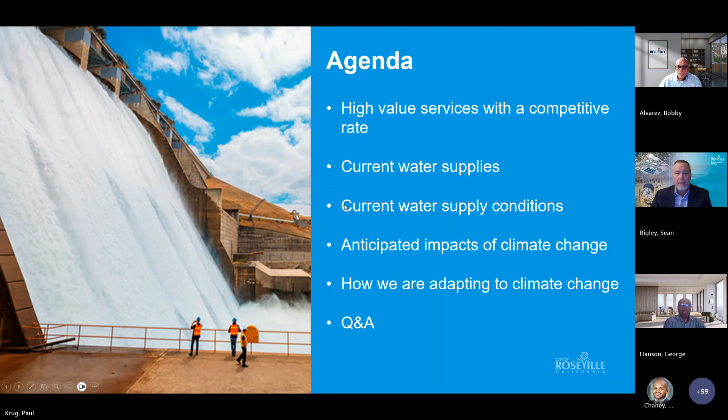All right, so in terms of our process relative to our rates, it's really important just to emphasize what the overarching structure is relative to setting utility rates. And really what we do is we look at our utility rates every 2 years. And what we incorporate in that is a 10-year projected outlook in terms of expenses and revenues. In that process, environmental utilities has focused in on proactively funding rehabilitation costs via rates for utility infrastructure.

As you can imagine, in the city of Roseville, we have a lot of infrastructure that has to be maintained in order to ensure that we have a reliable water supply going forward. And the way we do that is through a pay-as-we-go system, essentially funding over time a rehabilitation account. And what that allows us to do is to pay for those costs as they happen and also avoid costly borrowing. So really creating good value for our customers at a lower rate, if you will.

We have remained among the lowest utility rates in the region, and we provide competitive rates, but we also, most importantly, provide a high level of service. So we really see it as a good value for our customers for the level of service and the rate that's being paid. And then in terms of the city's financial management, the utilities have had a long history of being strongly managed from a financial perspective and have maintained a favorable financial position over many years.

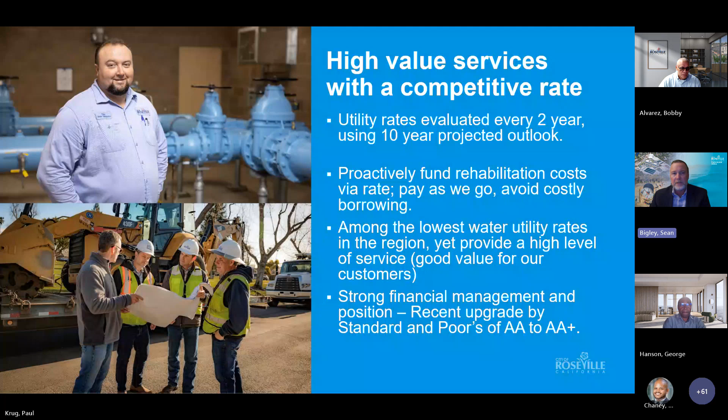Most notably, a fairly recent upgrade by Standard & Poor's raised our rating from AA to AA plus. So that indicates strength with respect to our financial position here in Roseville. Important just to state that.

All right, so moving on, I want to cover the current water supplies that are part of our mostly surface water portfolio, and talk a little bit in more detail about our groundwater system. So in terms of the supplies that Roseville has available, they are diverse supplies, incorporating both surface water supplies as well as groundwater sources. The first supply is a supply through the Central Valley Project. The Central Valley Project is essentially a federally run water project that supplies many water contractors throughout the state of California.

Roseville is a Central Valley Project water contractor. We have a repayment contract. It's an indefinite term water contract with the Bureau of Reclamation for 32,000 acre feet of water. An acre foot essentially is a football field minus the end zones with a foot of water. So to give you kind of context, that's how much water we're talking about. In terms of how many homes that serves, an acre foot will serve roughly 2 to 3 homes per year in terms of water supply.

The next surface water supply is through Placer County Water Agency, and that's actually through the Middle Fork Project, which is a county-wide project that was voted by the Placer County voters back in the 1960s. And with that, we've got a 34,000 acre foot contract with Placer County Water Agency. Additionally, recently we were able to successfully negotiate an amendment with Placer County Water Agency to add 10,000 additional acre feet of water as a future option to that contract.

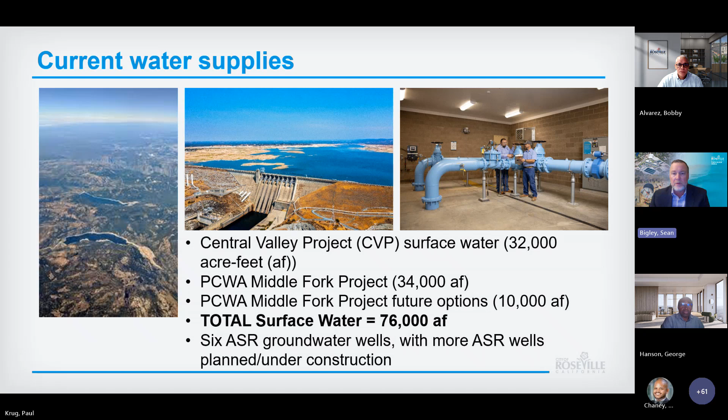All right, so with respect to the Central Valley Project water supply via Folsom Reservoir. So again, Folsom Reservoir is managed by the U.S. Bureau of Reclamation. Roseville does not manage that reservoir. We are just simply a contractor. And so that project was actually authorized by Congress in 1944. The Central Valley Project is a system of integrated reservoirs, canals, and other infrastructure that serves multiple contract cities and other contract users throughout California.

Folsom Reservoir is the reservoir that Roseville draws its surface water supply from. The construction of that reservoir began in October of 1948, and then ultimately the reservoir was completed in 1956. And then since 1971, Roseville has had access to Central Valley Project surface water.

And with that CVP supply, it's a contract. And so there are certain circumstances where there are provisions in that contract that require water cutbacks. And this is specifically during dry or drought conditions. And that is a condition of the contract. And Reclamation typically manages how those cutbacks would occur with each of the contracting agencies.

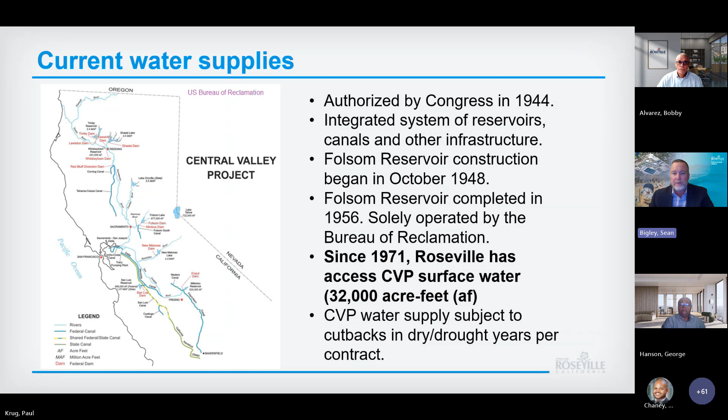All right, let's talk a little bit about the other sources of surface water through the Middle Fork Project, which is water access through a contract with Placer County Water Agency. So the Middle Fork Project was outlined in 1960. In June 1961, Placer County voters approved a $140 million revenue bond for the Middle Fork Project. And when we say voters, it's countywide voters, including voters within the city of Roseville at that time. Construction of the project was completed in 1967.

The Middle Fork Project consists of a system of reservoirs, canals, and other infrastructure with 342,000 acre feet of total storage. Again, the surface water from the Middle Fork Project that Roseville receives is now at over 40,000 acre feet with the options included. The Middle Fork Project has traditionally been used as a backup surface water supply. However, that water supply over time is going to end up serving the city's needs to ultimate build out of the city here in a couple of decades.

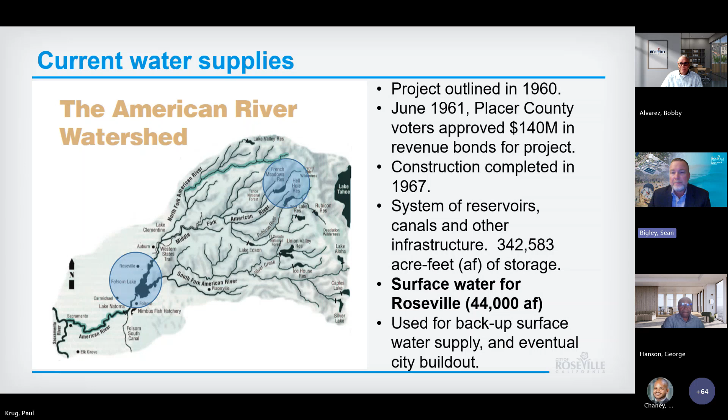All right, now I'd like to cover the other side of Roseville's water supply portfolio, and that's our groundwater system, via our aquifer storage and recovery groundwater program. Our aquifer storage and recovery groundwater program actually started in the early 2000s. ASR wells, as they're called, are unique in the respect that they're different than a traditional extraction well that most people are familiar with. They also have the ability to actually take treated drinking water and store that water in the groundwater basin that's underneath Roseville. So it has an extraction and an ability to actually store water through this technology.

We have 6 ASR wells in the system. We have 2 more that are going to be developed during 2025. And then the last 2 are scheduled to be constructed and completed roughly around 2027. Typically, ASR wells are used as backup for supply cuts during droughts and emergencies. But certainly there are options in terms of being proactive relative to groundwater recharge, which the city has explored and will continue to explore over time.

So from there, I'm going to go ahead and ask Bobby Alvarez to start his portion of the presentation. Bobby. Thank you, Sean.

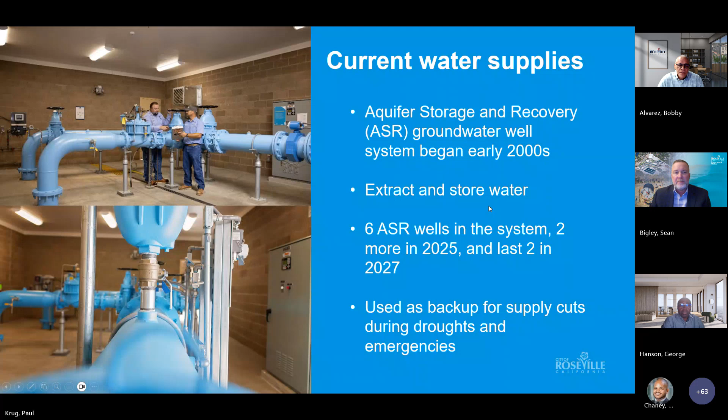My name is Bobby Alvarez, and I am the Water Conservation Administrator for the City of Roseville. During my presentation, I'll talk about this season's rain, snow, and lake conditions, which all contribute to our surface water. I'll talk briefly about the water use efficiency regulation, our water reduction, along with how we engage with our customers.

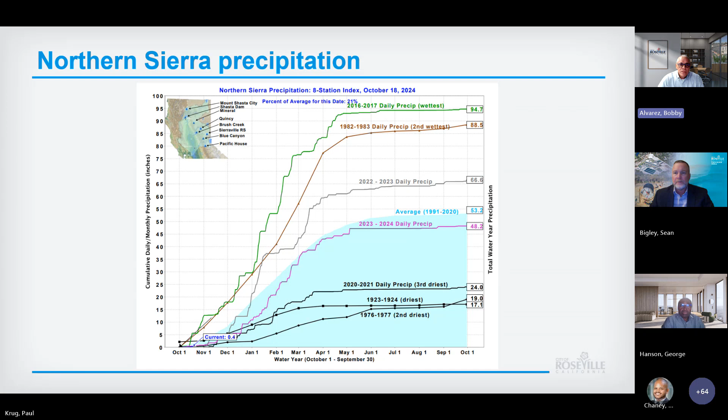This slide shows the pattern of rainfall. Sometimes we have a wet year, but if the rain pattern occurs before it gets cold enough to freeze, that can be a problem for our surface water. As you can see here, it was perfect timing to create a good snowpack up in the Sierras. Next slide, please.

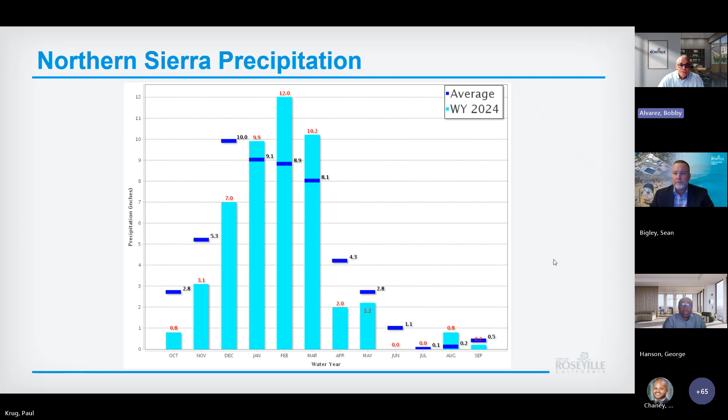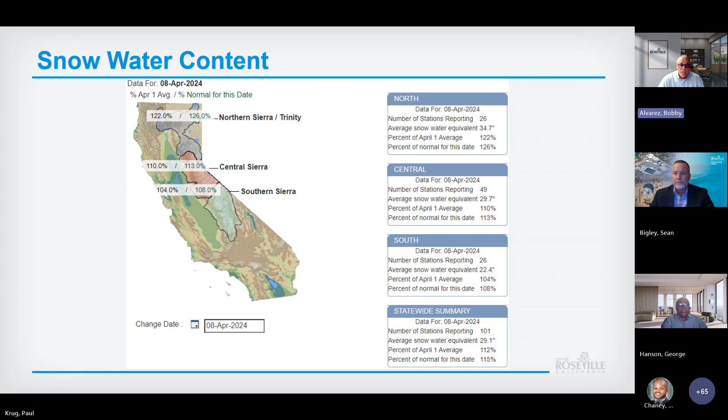Here is a snapshot of when the snow was at its peak this past April. For the central portion, we had 113% of normal for that date, and the average snow water equivalent of over 29 inches. Next slide, please.

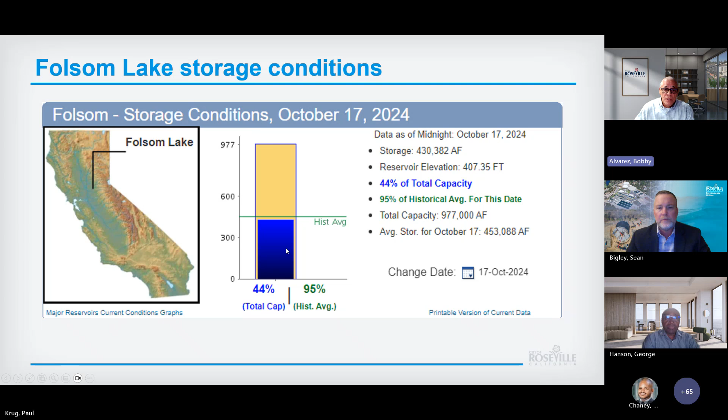I'm sorry, I think there's one slide before that. Currently, we are at 44% capacity. We are at 95% of historical average. The available storage space will be able to take on the anticipated rain and snow melt this coming season. Thank you. Next slide, please.

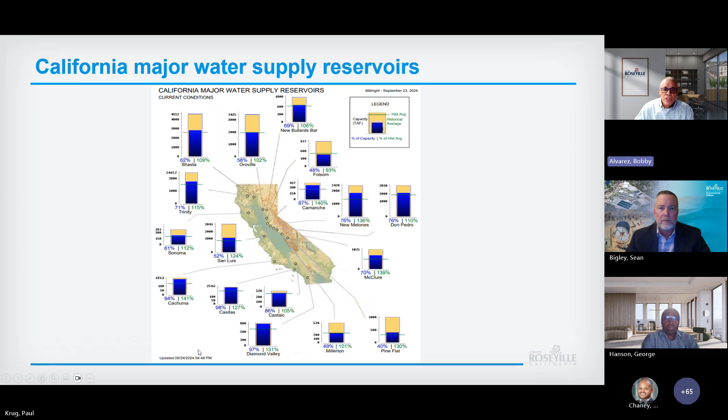Here are all the major reservoirs, plenty of blue throughout California. California had a good surface water year. Thank you. Next slide.

So the lake, it's at 466 feet of elevation. Storage is close to 1 million acre feet. Inflows as of last week were at 583 cubic feet per second, and releases were at a little over 1,500 CFS. The water intake is at 317 feet, but we cannot operate the pump station at 330 feet due to daylighting. Currently, the lake is at 407 feet of elevation, so we have plenty of water before we reach that point. Thank you. Next slide.

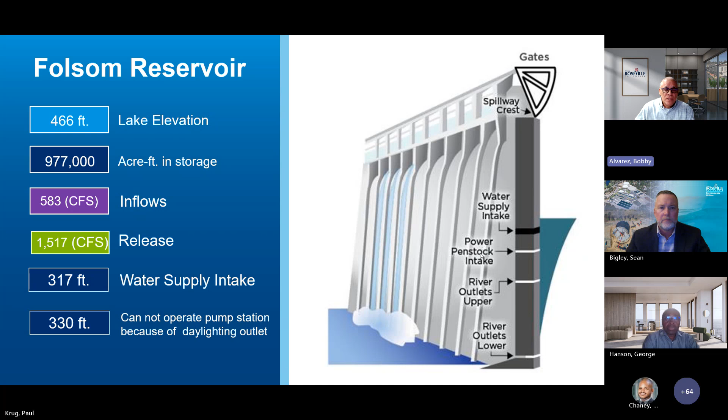Okay, so in 2018, Governor Jerry Brown signed into law 2 new bills that will require urban water providers throughout California to set new permanent water use targets for their service areas. These 2 bills are Senate Bill 606 and Assembly Bill 1668, also referred to as the Urban Water Use Objective. The standards are residential indoor use, residential outdoor use, water loss, and CII, commercial, industrial, and institutional.

There are monetary fines for noncompliance, which will begin in 2027. They are $1,000 per day and $10,000 per day in a drought year. But just to be clear, there's no impact to customers. Enforcement and fines, if imposed, of the regulations are on the water agencies. We are not currently envisioning assigning each home any individual water budget. Commercial businesses have had a water budget for quite some time prior to this regulation, and those are addressed on a case-by-case basis with each business.

Roseville is doing everything to minimize the impacts to residents and commercial businesses through efforts such as improving our leak detection, water-wise house calls, commercial evaluations and surveys, rebate programs, DIY, and education, advanced metering infrastructure, AMI, just to name a few. Please know that the primary goal of these laws is to use water more wisely, eliminate water waste, and strengthen our local drought resilience.

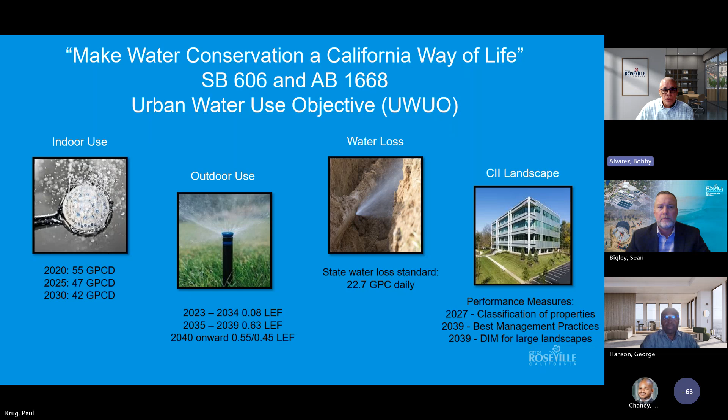Roseville is doing a great job. We came under budget of actual water use compared to the urban water use objective by 14% for last year's regulatory reporting. And it looks like we are on track to be below budget this reporting year. But if you notice, the parameters of the standards get tighter as the years go on. So we can't let up on the good work we are doing. So if you have any questions on how you can do more, we're here to help. Please don't hesitate to call our office to schedule a house call or a survey to get started. Thank you. Next slide.

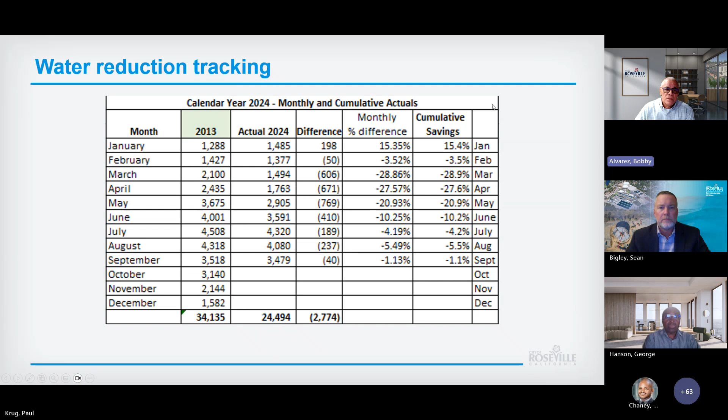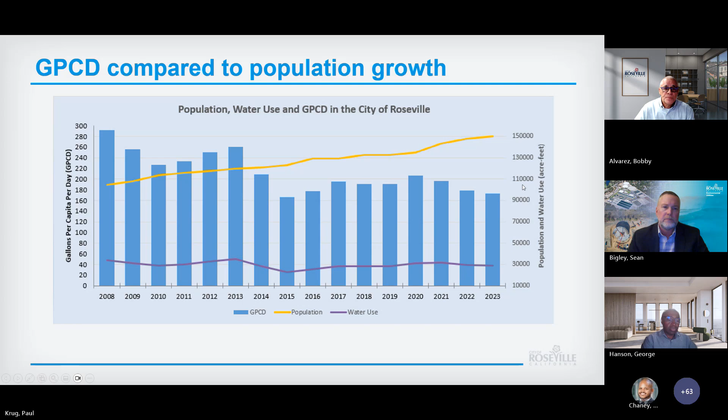And last slide for me. Okay, so engaging with our customers. In our water efficiency section, we have a diverse staff of specialists. We have landscape contractors, certified irrigation auditors, arborists, botanists, leak experts, you name it, we have it. We're asking you to reduce water use outdoors based on the season. So right now it's getting a little cooler, so you should adjust your irrigation systems.

We have our water-wise house calls, which I mentioned earlier, for both indoor and outdoor. We have our rebates, which we expanded for our cash for grass. And we have a couple of websites here for additional resources. So I think that's it for me, and I will pass it along to the Water Utility Manager, George Hanson.

All right, thank you, Bobby. Good evening, everyone. My name is George Hanson, Water Utility Manager. So I'll switch gears here and I'll discuss the impacts from climate change and how climate change has introduced some uncertainty regarding long-term water supply reliability for the American River Basin.

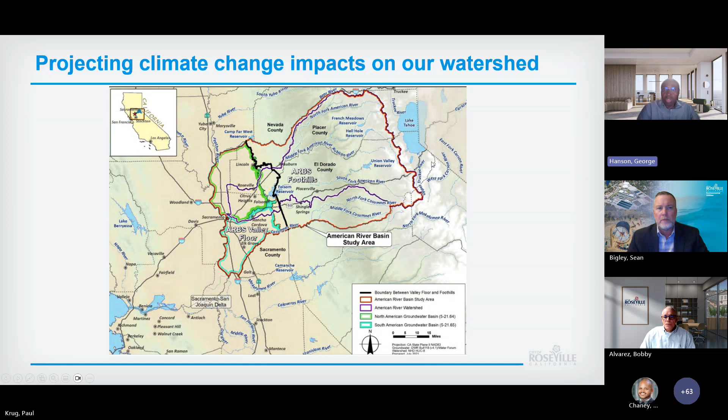A couple of years ago, in 2022, the Bureau of Reclamation, in conjunction with many local water agencies, conducted a study referred to as the American River Basin Study. The study looked at future climate and hydrology projections, and also identified some important water supply vulnerabilities. So I'll touch on a couple of these vulnerabilities, some of those key issues, and how those will impact the region long term. Next slide, please.

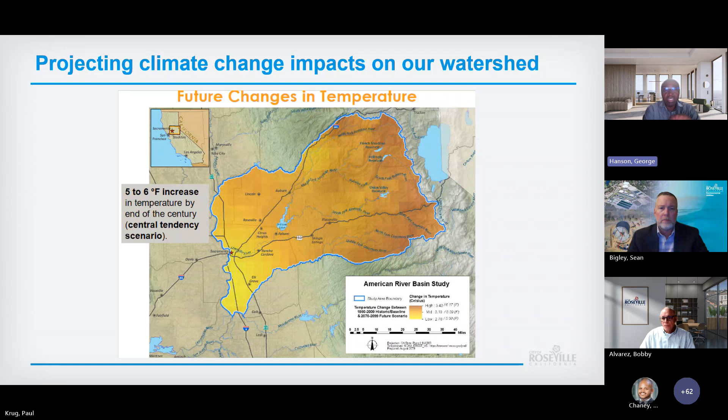So the first of those key findings is shown here on this chart, and it's regarding temperature. The projections are estimating that by the end of the 21st century, temperatures will increase by approximately 5 to 6 degrees, with more significant impacts being in the upper watershed, which is shown by the darker colors on this slide. Next slide, please.

And so reservoirs such as Folsom Reservoir will see a lot of added stress because of a lot more moisture coming into the reservoir. So there's going to be more flood releases during the colder months from Folsom Reservoir, which will then potentially result in reduced water available in the reservoir during summer and fall periods. Next slide, please.

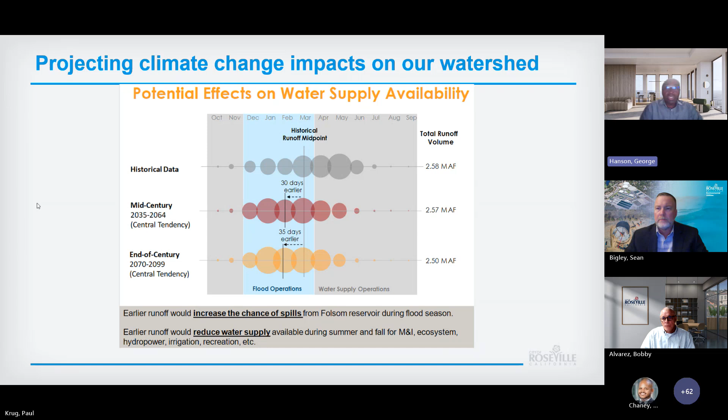As a water utility, we have adopted a long-term infrastructure planning strategy, understanding that the infrastructure that was built to address 20th century climate conditions won't necessarily provide the reliability we need for our water supply going into the future. So we've had to evolve our thinking, our strategy and our planning. And we are working on designing and building systems and infrastructure that will address different 21st century climate realities.

So over the next few slides, I'll walk us through some of the strategies that we've been planning and working on, both to diversify our water supplies and also to provide reliable access to already existing water supplies. Next slide, please.

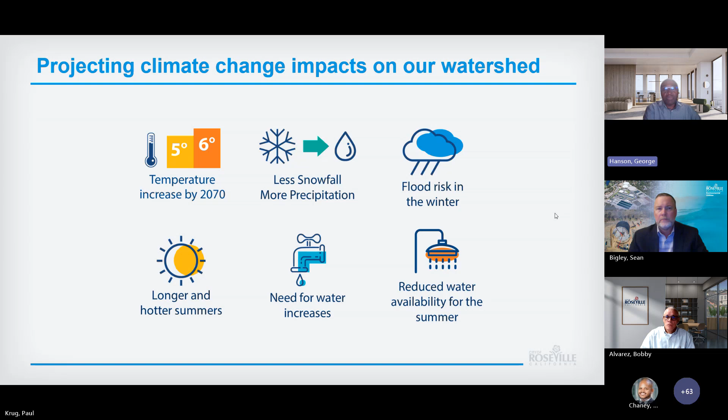So one of those strategies, Sean already discussed this, is to leverage groundwater as part of our strategy. Sean already discussed this, so I won't belabor this point. But our ASR program essentially is built to help address long-term climate change impacts, providing reliable water sources as we leverage groundwater. Next slide.

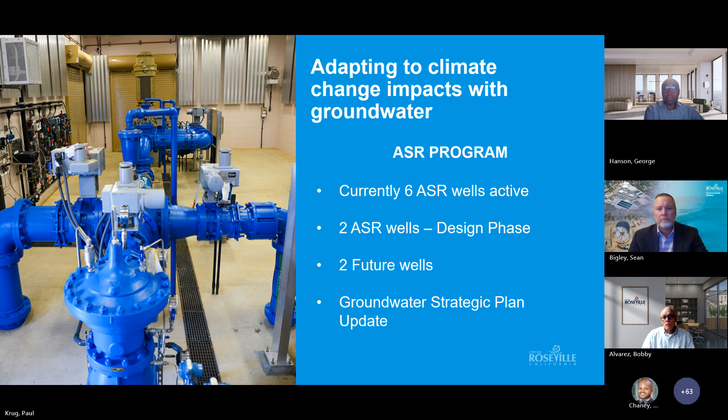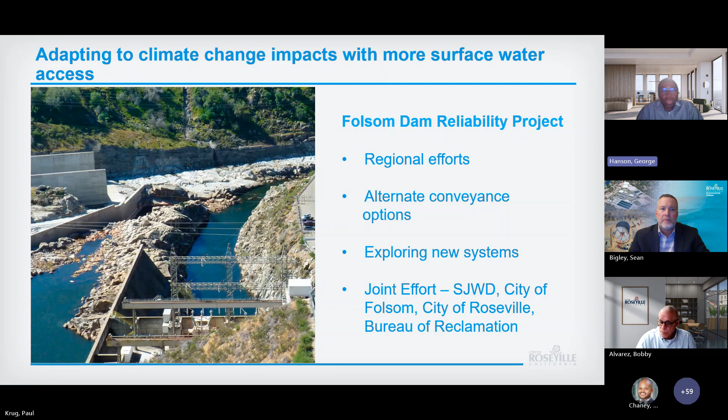So we're currently wrapping up those technical evaluations, looking to put forward some recommendations from that study after the work is done to the Bureau of Reclamation for further discussion. Next slide, please.

So the RiverArc project is another regional effort that Roseville is involved with. The RiverArc partners are Placer County Water Agency, City of Sacramento, Sacramento County, and Roseville. Roseville has been part of this partnership for a while. I think we stepped aside briefly around 2018, thereabouts, to focus on other water resource reliability priorities and efforts. And then late last year, the RiverArc partners approached Roseville and discussed the possibility of Roseville rejoining the partnership.

At the time, they had received a grant for $5 million from the Wildlife Conservation Board to conduct the pre-design and environmental work for the project. So the timing was right for Roseville. So Roseville City Council, I believe in September, gave approval for Roseville to rejoin the RiverArc partnership. So what that does is it allows us to participate in phase one of the project, the environmental phase, to make sure that Roseville's water demands are contemplated in the environmental analysis.

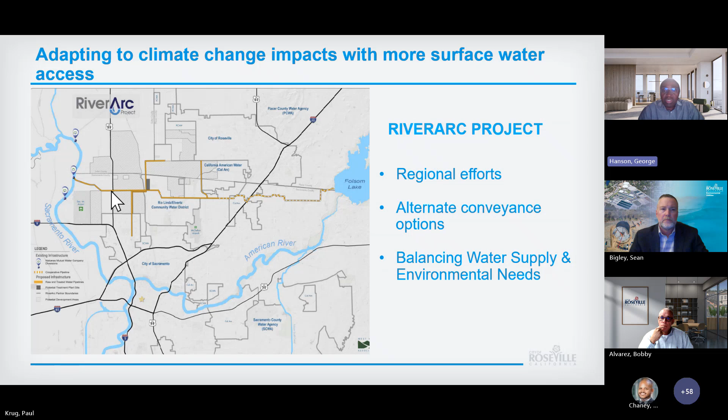So RiverArc originated in 2000 with the Water Forum Agreement. It's really structured to provide a broad range of benefits for the region. For the Sacramento region, it will increase water supply reliability by balancing the two major water supply sources, the Sacramento River and the American River. So the project, on the next slide please, will utilize an existing water diversion structure on the Sacramento River and will essentially build raw water infrastructure to a new treatment plant. The location of the treatment plant is still in the works. The partnership group is looking at a few options.

So a new treatment plant will be built, and then there'll be treated water conveyance infrastructure built to Placer County to serve PCWA, Roseville, and Lincoln sometime in the future. And then also to Sacramento to serve City of Sac and Sacramento County. So these are some of the options that we're looking at regarding long-term water supply reliability, to ensure that we have a broad portfolio of options to address the challenges we see in the future, to make sure that Roseville is well positioned to have resilient water supply infrastructure and supply to support our customers through build-out of the city. And I believe that's my last slide. So with that, we will open it up for questions.

Bobby and George, thank you so much for taking the time to step through those slides and give us a more comprehensive picture of the water utility, water supply, and how we're mitigating against climate change. We do have a handful of questions. I kind of batched them. There are some water supply and water quality questions, some questions about manufacturing, economic development, and balancing that against water supply, and then a question on infrastructure, specifically related to groundwater wells. So maybe let's start with that. One person asked, what is the current storage capacity of the 6 wells, and what will the storage be with all 10 wells?